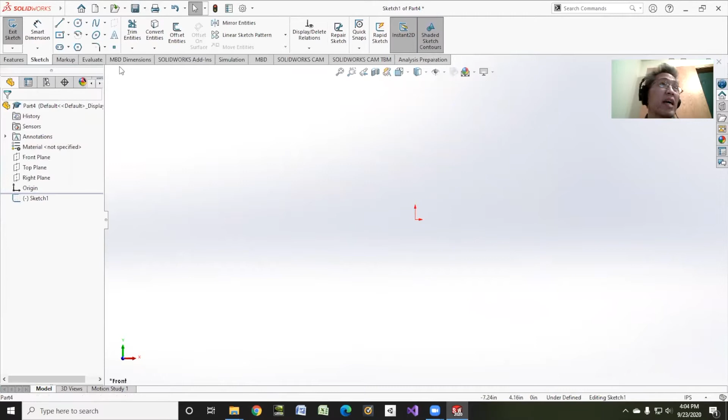This is going to be 949B, for those of you following along. Sketch. We're going to do this on the front plane. And I'm just going to make a circle. Center it on the origin, and I'll put a dimension on this guy. And it is going to be, all right, now I'm going to go ahead and right from here, I'm going to extruded boss base. And actually, no, not yet. Let's go back to sketch. Let's make one more circle. And dimension that.

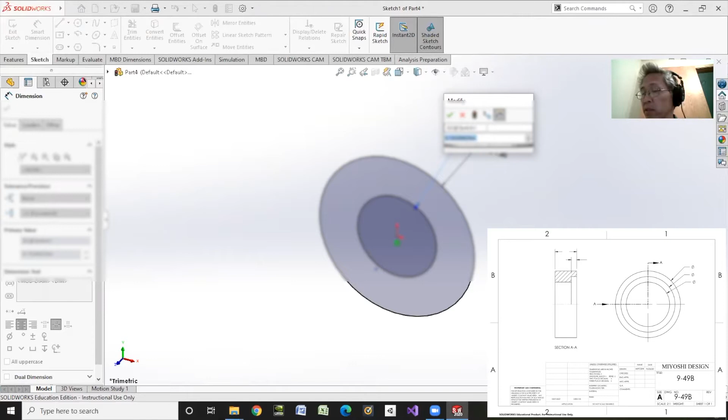Oops, that's not it. Nope, that's not either. All right, that's good. And then we'll go to features. And then extruded boss base. I'm going to extrude that whole thing, whatever it's supposed to be. And then that's good. I think it's a little tall. That's way too tall. All right, extruded boss base.

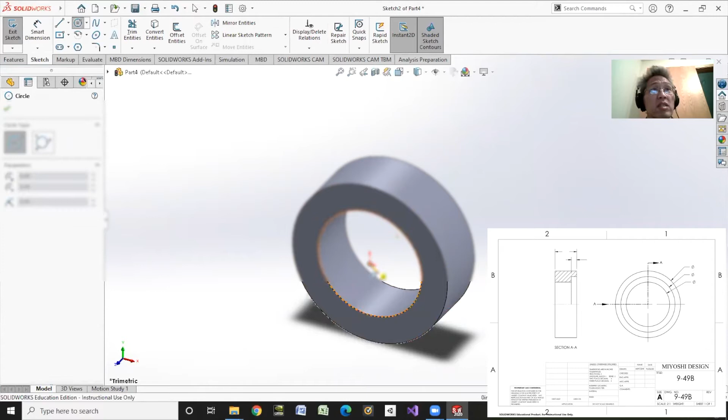There we go. All right, now what we're going to do, we're going to make a new sketch. We're going to put that sketch on this top face. And we're just going to put a circle centered on this origin. And that's going to be smart dimension. Oops, too big again.

Okay, now we're not going to extrude this all the way. This is going to be the first time we're going to do extrude cut. Well, maybe not the first time. We're going to do extrude cut. And we're just going to extrude cut that downward. Yeah, that's about right. And I did measure these, but decided I was going to change my thought process. And there we have it. So now I'm going to save this guy. And this is 9-49B.

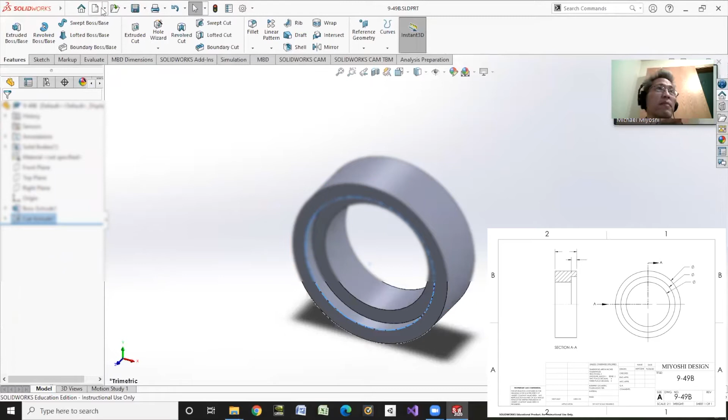And there's the model. Now I'm going to make a drawing from the model. Oops, not that. I like to do the triangle there, make drawing from part. ANSI landscape A. And again, I like to go to drawing, model view, click on the next. And this one I started in the front plane, so I'll click just the front plane. I don't need multiple views. Make sure it's got hidden lines. And looks like the scale is going to be not what I want, but I'll change scale later. Well, maybe it will be what I want. Put that view there. And I don't need another view, so I'll just hit the escape key. And there we have it.

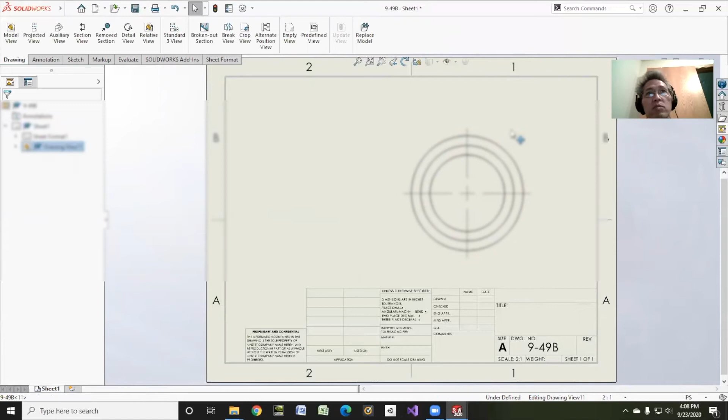Now, again, I'll just make a section view. I want the right view to be my section, or if I want the left view, let's change this time. Let's make the left view the section. So let's move it over to the right a bit. And I'll make a section view. It's a half section, because we're going to only cut a quarter of the way. And I'll grab this left section there. I'll grab the center. Make sure you grab the center again. Remember, otherwise it's going to be off. And I'll pull it to the left. And there it is, my section AA.

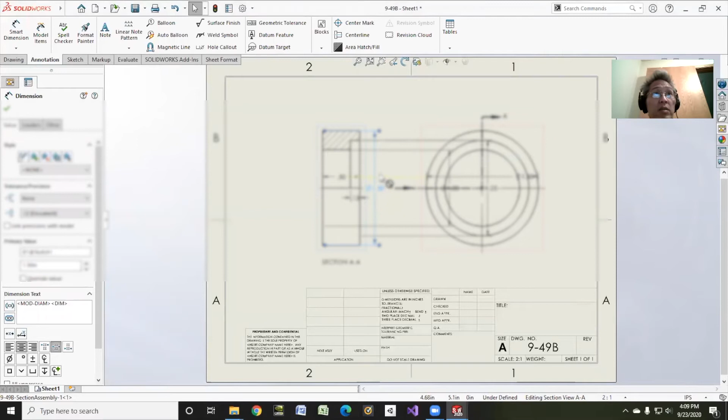Annotation, model items, all views, entire model. Hit OK. And I don't know why it's doing it that way, but that's OK. Just hit the control key and grab this dimension, bring it over here. Oops, I don't know what that did. Control key, grab that, bring it over. Oh, it's right there. OK. Change that, leader, do diameter. Bring it out here. It's good. Hold the control key, grab this guy over there. Leader, diameter. Get rid of that. And grab the last one, control, drag it over here, click on it, leader, diameter, put that guy there too, then I get rid of that there.

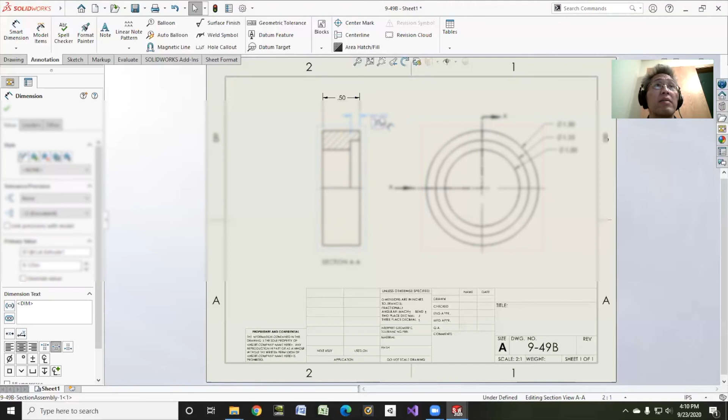It's 0.13, I want to bring it up top. I can get rid of this guy. I can bring this guy up on top. I was going to tell you what that dimension was, that's okay. Pull this up there, pull this endpoint up there, grab this one, grab those two endpoints. That one only goes to there, so leave it there. Oh, pull it down, just a little farther. Pull this guy up to there, and there we have it. And I could probably bring this dimension, oops, not that dimension. I could probably bring this dimension outside. There we go. Bring that outside there. A little bit more readable, a little bit more beautiful. Maybe take it up just a touch. There we go. And there we have it. All my dimensions done.

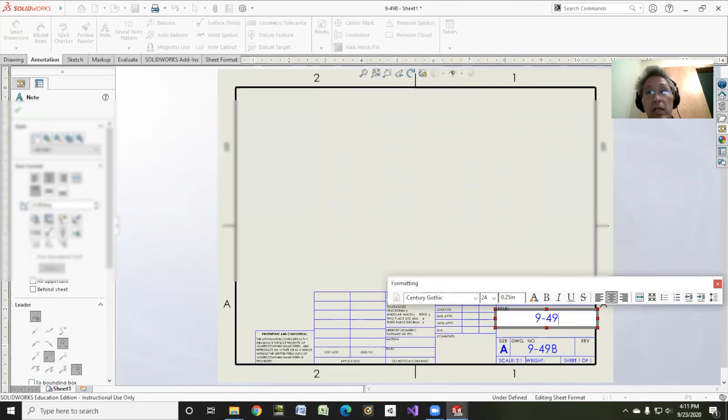Right click sheet format, edit sheet format. Put my name in here. The date. And then, of course, the title. And I'll just put 9-49 since I don't have anything better. I have no idea what it is. Oops. Capital B. And then, of course, name of my design firm. There we have it. Notice the scale is 2:1.

And when I take away the dimensions, so you can't see them here, you can look on GitHub, grab the non-dimensioned drawing, print it out, and measure your own dimensions. That would be great. That way you get a little chance to measure using calipers and that kind of stuff. So there is another half section, 9-49B.

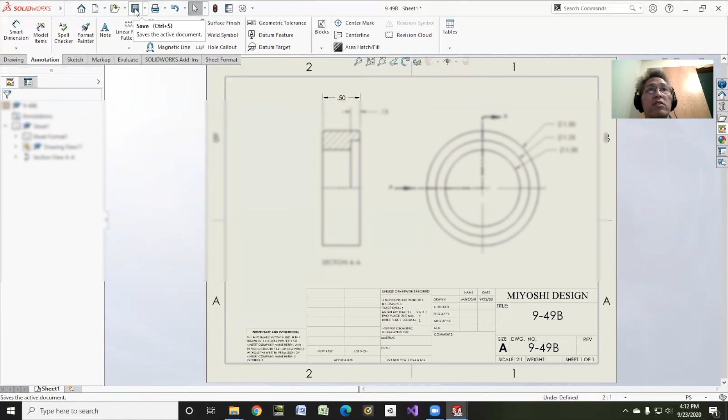Oh, wait, we need to make sure we save this guy. And we'll just save that drawing there. That's perfect. And then we'll also do a save as, and save it as a PDF as well. And there you have it, half section.